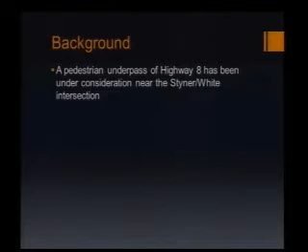As the Mayor introduced, this is a final report on the feasibility and concept assessment of the Styner and White and Highway 8 pedestrian and bicycle underpass. I'll just provide a little bit of background. The pedestrian underpass has been under discussion near the Styner and White Avenue intersection with Highway 8 for approximately the last 4 years since a student class worked on the project.

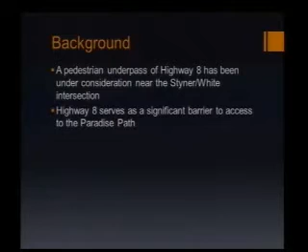Currently, Highway 8 serves as a significant barrier to access to the Paradise Path. The majority of the city's residential properties and development is north of Highway 8, and the Paradise Path comes through the city east-west and is located south of Highway 8.

As I mentioned, in 2011, Professor Fritz Fiedler's senior civil engineering class conducted an assessment of the underpass. That class study indicated that it was feasible, and they did not anticipate it to have adverse impacts to flood events in the surrounding area. That information was conveyed to the task force, to the Parks and Rec Commission at that point in time, and to the City Council.

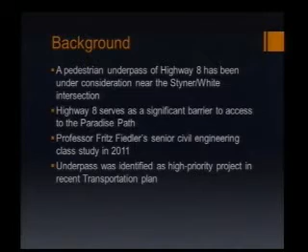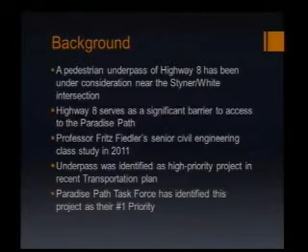This underpass was identified as a high priority project in the city's recent long-range transportation plan as an identified crossing improvement on Highway 8, and it's been reported as the #1 priority for the Paradise Path Task Force, or should I say Moscow Pathways Commission now, as a long-term priority project for them.

Just a few facts that the council may not be aware of about mobility in Moscow. The community does place a high value upon walking and biking for transportation needs. If you were to look at recent surveys, this is from the American Community Survey 2006 through 2010, 5-year estimates, 19.6% of the residents identified walking as their primary means of transportation to work. That's compared to 2.9% on the national average.

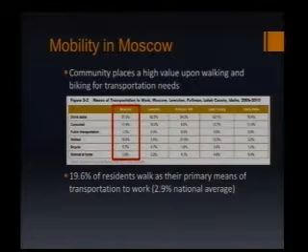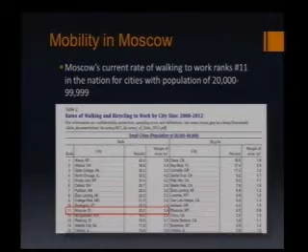Also, 5.7% of the residents bike to work as their primary means of transportation, and that's compared to 0.6% on the national average. Moscow's current rate of walking to work actually ranks 11th in the nation for cities with population of 20,000 to 99,000, just under 100,000 population. So we're number 11 in the nation for rate of walking as the primary mode of transportation to work.

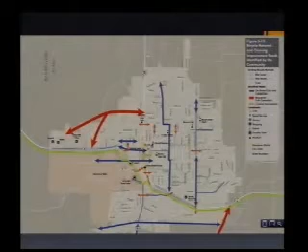As I mentioned before, it was identified as an impediment in the transportation plan. The pathway there is indicated on the green line. Obviously, the highway is located north of the pathway and serves as a barrier to a large portion of the developed portion of the community that is due north of that location.

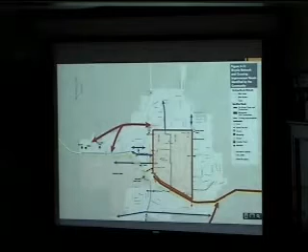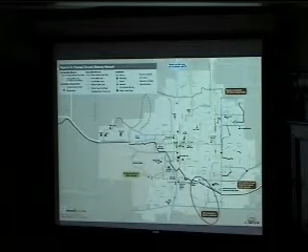What we're talking about tonight is really central to that point, and that's the crossing enhancement that was identified in the transportation plan at that intersection of Styner, White, and Highway 8. Again, the orange dot is identified as a priority project in crossing enhancement of the highway.

As the council is aware, on October 6th of 2014, the council approved a study to confirm the findings of the student project in 3 phases. Phase 1 was to validate the hydrologic and hydraulic assessments of the bridge structure to verify that with the path addition there would be no rise in flood events, which is a requirement for FEMA whenever you're doing any work in the floodway.

Phase 2 of the project was to assess the constructability of an underpass and establish an estimate of cost of construction of the underpass. And Phase 3 included an assessment of the environmental impacts, specifically wetland delineation, to understand any mitigation that may be required as part of the project. Terragraphics Engineering was selected to conduct the assessment.

On November 3rd of last year, staff presented the Phase 1 findings, which indicated that there were no adverse flood impacts. At that point in time, the council approved moving forward with Phases 2 and 3 to complete the concept design and the wetland delineation work.

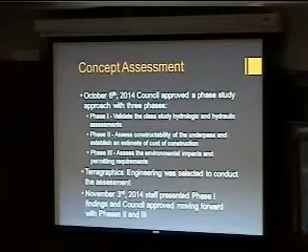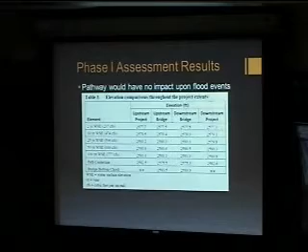As I mentioned, under the Phase 1 assessment, the study indicated that the pathway would have no impact upon flood events. Actually, there are some lowered elevations in a few instances due to smoothing of some of the bank edges, but for the 2, 10, 25, 50, and 100-year events, the pre-project and post-project conditions are virtually unchanged.

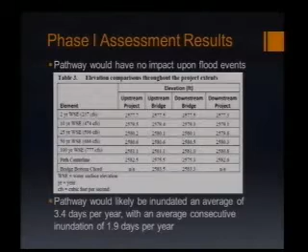Phase 1 did indicate that the pathway would likely be inundated an average of 3.4 days per year, with an average consecutive inundation of 1.9 days per year. So it would get wet at periods of time, but that'd be happening at a time where there might be a little bit lower pedestrian bicycle activity and be for fairly short duration events.

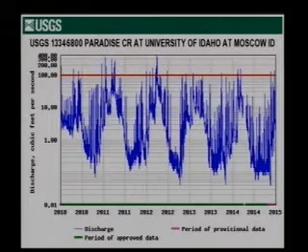This is instantaneous flow charts here from 2010 through just the 17th today. You can see that this red line indicates the 100 CFS. That is essentially the flow rate at the gauge station, at which point the pathway will be starting to get wet. You can see we had two little peaks here just last week when we had the high water events during the snow melt and heavy rain events. So there were short periods of time last week when that pathway would be covered with water. But you can see that it's fairly short-lived and not a great number of events where that would occur.

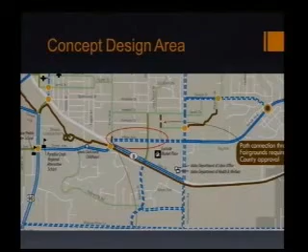As we approach the concept design, we referred to the transportation plan that really was focusing on the pathway that's on the north side of the Joseph Street Playfield project that then connected to Meadow Street to head down south. There's now a pathway on the east side of the Playfield project that would provide a continuous pathway connection around that east edge, across Joseph Street at the Meadow intersection, continue on to the end of Meadow, and then through the Heron's Hideout path section that's currently constructed to a crossing of Mountain View through the fairgrounds, back out to White Avenue, and then to this point of crossing.

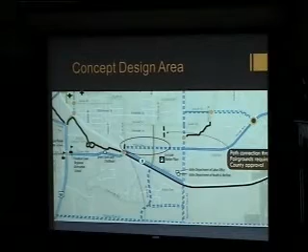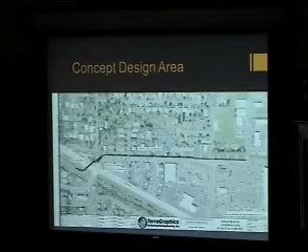So the scope of the project really picked up from the fairgrounds entrance drive to that crossing location at Styner and Highway 8. So the concept design included both the underpass itself and its tie-in to the pathway on the south side of the highway, as well as a separated pedestrian pathway transitioning to a sidewalk facility there to provide continuous connectivity to the fairgrounds center access drive.

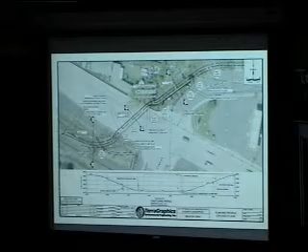The details are a little bit difficult to see, but the overall design of the underpass is a 10-foot wide facility maintaining 8 feet of clearance from the bottom chord of the bridge structure. Approaches are designed at 8% grades, both in and out from underneath the bridge structure, with a retaining wall required both on this upper side to adjust the grade break between where the path's coming up to meet with the existing road grade, as well as on the path side to support the path structure and the fill material required to create the path base.

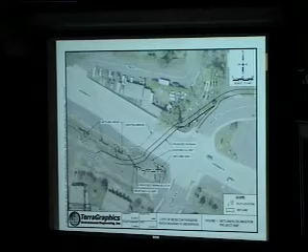There are section details. These don't show up very well on the screen, but there are section details both for the downstream bridge crossing coming out the bridge structure section. This is on the upstream side of the bridge crossing, and then the separated pathway facility continuing on down to the fairgrounds property. As I mentioned, we also conducted Phase 3, which was a wetland delineation of the project. There were a few small wetlands that were identified, but the areas of disturbance are well under 1/10 of an acre, so no wetland mitigation would be required. So that does simplify the environmental permitting process for the project.

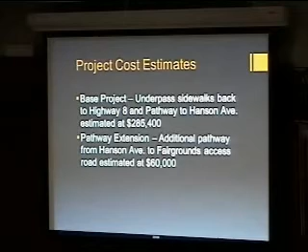As I mentioned, Phase 2 was to do a concept design and develop a cost estimate of construction. It's broken out into two components that are included in the cost estimate. The first was a base project that constructed the underpass with the path tying in, and then extended a pathway down to Hanson, which is the first street on the north side of White Avenue, just to the east of the intersection. That was a minimum point of transition where we could provide a crossing of White Avenue as well as a clear point of entry of cyclists and pedestrians into the facility. We added the pathway extension that then would pick up from Hanson to the fairgrounds as an additional project component. And that was estimated at $60,000, so $345,400 is really the total project cost estimate that was prepared by the consulting engineer on the project.

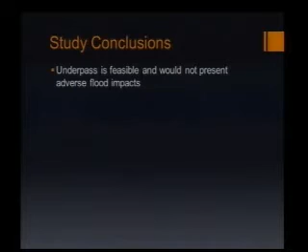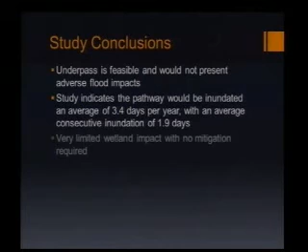So overall, from the study's conclusions, the first of which is the underpass appears to be feasible and appears that it would not present any adverse flood impacts, which certainly is necessary for any type of work that would be happening in the floodway. The study does indicate that it would be inundated an average of 3.4 days per year, with an average inundation of just under 2 days. There are very limited wetland impacts and no mitigation required, so that does help streamline the permitting process. And as I mentioned, the construction cost estimate is $285,400 for the base project and $60,000 for that additional extension to the fairgrounds property.

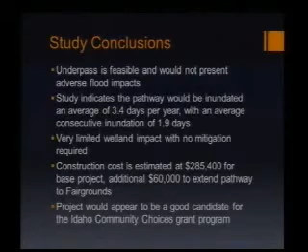Having reviewed the project and some of the granting programs that are available, the city's grants coordinator has indicated that they feel that this is a good match for the Community Choices grant program. And so that certainly is a potential avenue that could be pursued to try to secure funding for the construction of the facility. So with that, I'll just wrap up my report, and I'd be happy to try to answer any questions that the council may have.

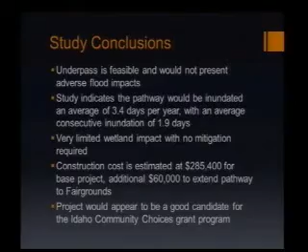Wayne, Public Works and Finance Committee heard this on February the 9th. Well, we did, Mr. Mayor. We looked at that and received basically the same information that Bill had. I clarified that there was going to be security lighting within the structure itself.

We talked a little bit about what it was going to cost for maintenance when the creek did come up high and there would be mud and debris. And Tom Grundon indicated that just running the city equipment through there with a sweeper would sweep it off, so it's a minimal amount of maintenance involved. And with that, the Public Works and Finance Committee did recommend approval. Okay. Other questions for Bill?

John? Did I miss, we've got the 285,000 and the 60,000 to complete the project for 345, and Alyssa is going to be working on trying to find some grant funding. What kind of match are we talking about? The Community Choices Grant Program has a 7.65% match, so that would equate to a little over $26,000 on a project of this scale. Okay, that's what I thought. All right.

I was not at all sure about this when it first was mentioned, but all of my questions have been answered, and I think we ought to move forward with it. So, one more. Could you comment a little bit on the timing when that grant might come available and what potential year of construction we'd be looking at?